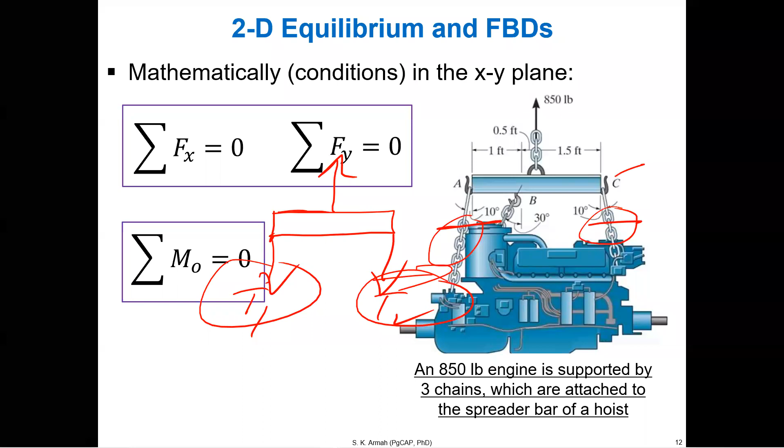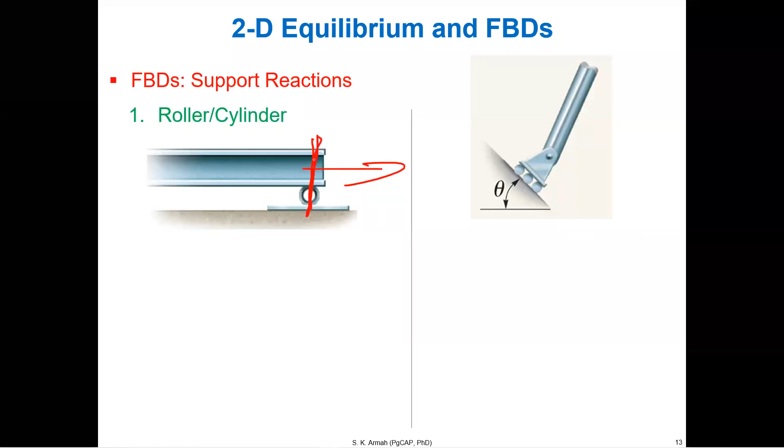So we talk about a roller. A roller allows movement this way, but it doesn't allow movement that way. So it means we have a reaction there, that's what we call a support reaction. And that support reaction is perpendicular to the surface.

And then we have the pin or a hinge. A 2D pin or hinge can only rotate this way. It doesn't allow movement this way or that way. So we have two support reactions, two force support reactions.

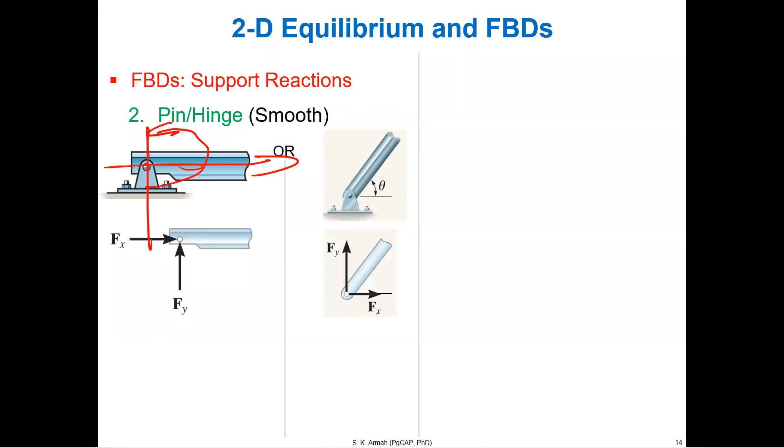Sometimes we show Fx, Fy, or sometimes we show the resultant F, where this resultant F is square root of Fx squared plus Fy squared, and the angle phi is tan inverse of Fy over Fx. So whatever the case, we have two unknowns. Either you use Fx, Fy, or you use only one single force at an angle.

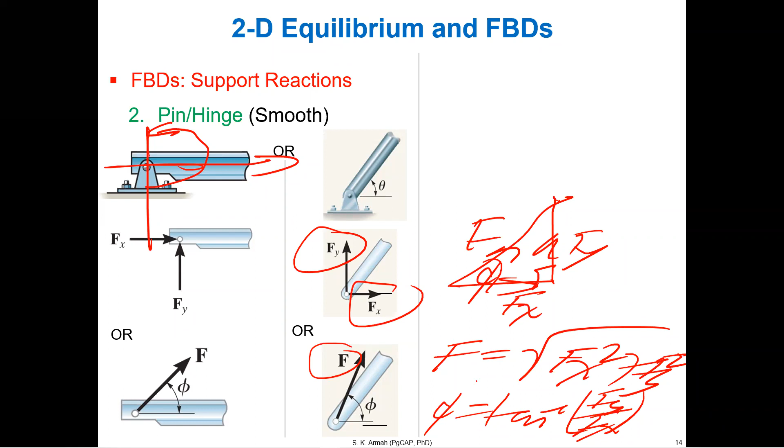And these two forces meet at 90 degrees. So if you draw Fx and Fy at 90 degrees, the resultant is F at a particular angle phi, and that phi can be found using tan. And the F, do a simple Pythagoras, F will be the hypotenuse.

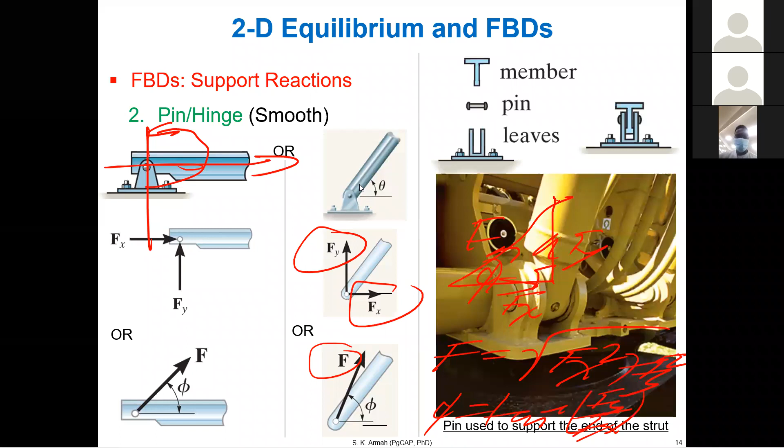And I'll show you how practically these things are connected. The other one we'll be dealing with is a fixed support. It's like you put something in concrete or a wall, and the beam is in the wall, like you put concrete or cement around it. So it cannot rotate, it cannot move anywhere.

So for a 2D case, the support reactions are Fx, Fy, and then there's a support moment reaction. These are support force reactions, these are support moment reactions. And then there's a collar, but I don't want to talk about collar.

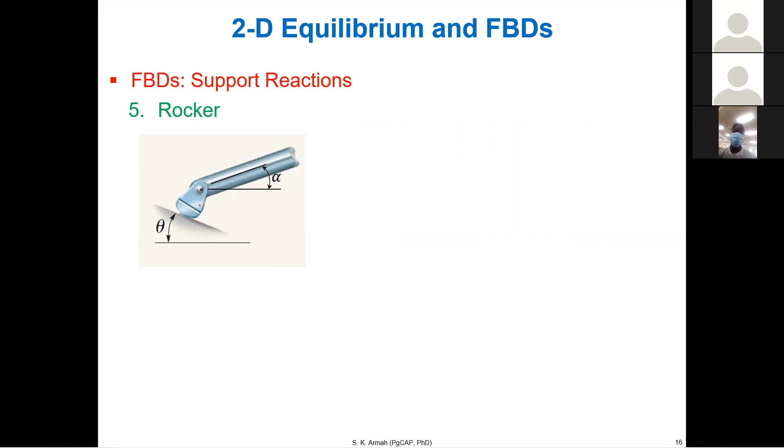Rocker is also similar to a roller, but only the way they design it is different, as I told you. Rocker allows the structure, this could be a big bridge, and rocker could be small or big depending on that. So it allows the thing to rock, it allows the structure to rock up and down. So it also allows movement, like the way the roller allows movement of the beam or the structure.

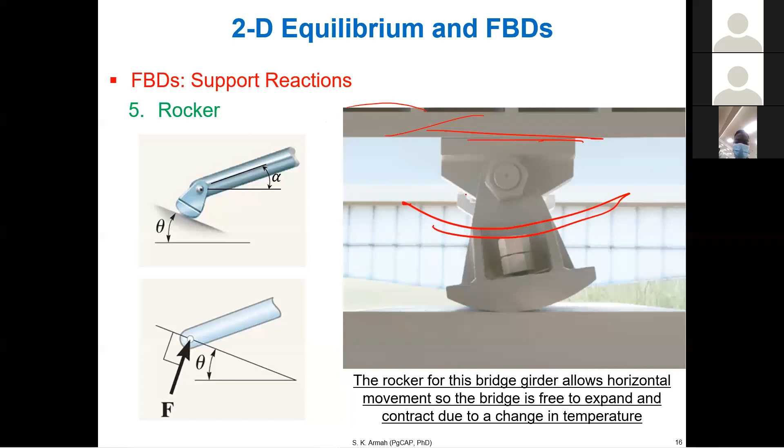So I start by drawing a free body diagram of that in class. I didn't solve anything yet. In fact, we're going to solve for an unknown. But here I want you to get into the mode of drawing free body diagrams.

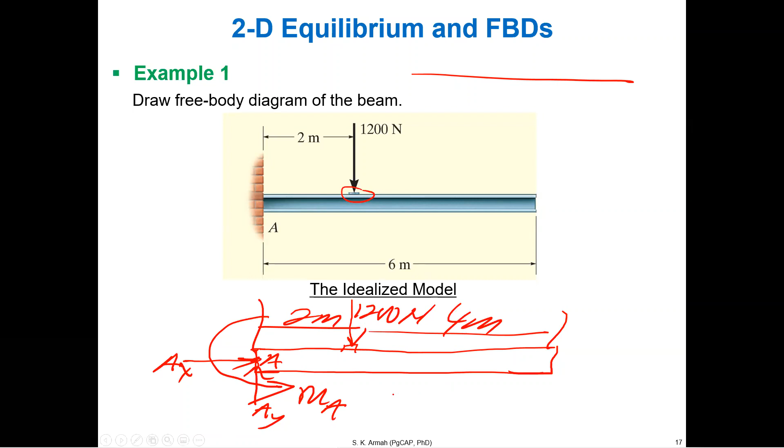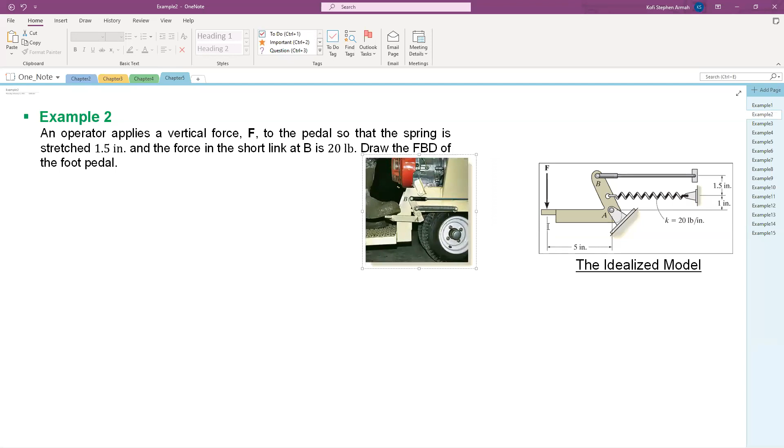Okay, so who wants to read the question? We are not solving anything for now, I'm just drawing free body diagrams. Later we'll solve some problems - right now I will just be drawing free body diagrams. So who wants to read the question? Sally again - you know the way I'm annoying with you. Okay, read.

An operator applies a vertical force F to the pedal so that the spring is stretched 1.5 inches and the force in the short link at B is 20 pounds. Draw the FBD of the foot pedal.

Okay, so FBD here means free body diagram, yeah? FBD here means free body diagram. So anytime you see me writing FBD, I mean free body diagram.

Okay, so the first thing is to draw the structure - draw this, what do you call it, the linkage of interest, or the pedal is all this. So you have to remove everything from it.

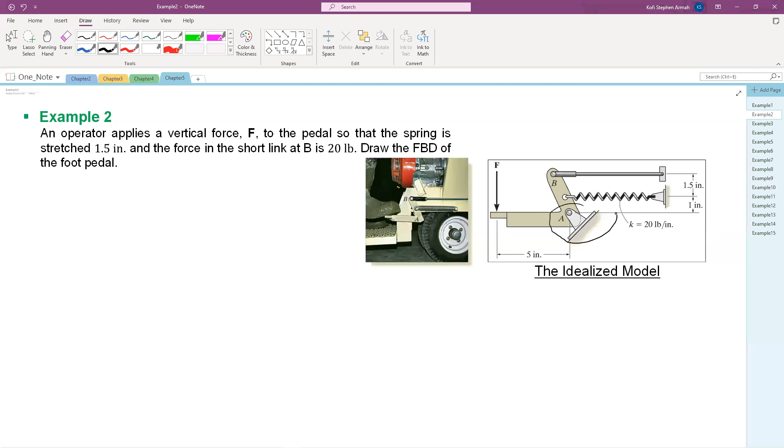What is this? What is this? What is that? And that is what is here - that's the red thing, that is what is here. What is that, Robert? Yeah, it's the hinge support. That's a hinge support, thank you. That's a hinge support.

So we'll take the hinge off. I'm going to draw exactly how the thing looks like. So we have this.

What I'm using might be difficult to draw, but I'll try. If I have a marker on a board, that's a different thing. So it goes like that, and then it bends. If you are drawing, I'm sure you'll do better than what I'm using with this pad stuff. So what I'm doing is trying to just draw what is there. It didn't come out well, but it's okay.

At this point, let's show what is known first. What is known is the way the guy is pressing it. The guy is using his boot here to apply a force, F.

We cut the linkage. This is a link, it's a bar, so there'll be tension in it. And this is like a spring, also there'll be tension. So you cut them. One is at this point here, so we cut it, and we show the arrow this way. And then one at this end, you cut it and show an arrow that way.

The force in the linkage, this linkage, is 20 pounds. So you put it there.

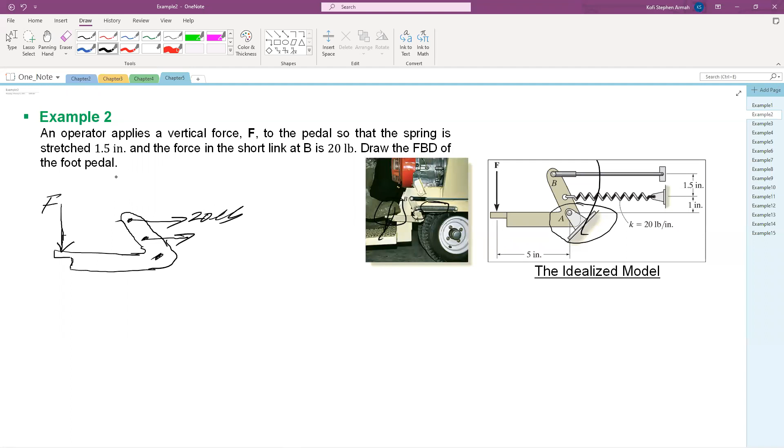The force in the spring is not given directly, but they gave it a stretch. After the guy has pressed it down, they give us how much the spring is going to stretch, as 1.5 inches. So we know the spring constant or spring stiffness. We can find that using F equal to K times the extension. Then the force in the spring generated will be 20 pound times 1.5, and 20 pound times 1.5 is 30 pound. So this is 30 pound.

Then you put it on your free body diagram. The next one is, and listen carefully, we don't have any coordinate system here. So you can show like this is an X, this is a Y. Let me do another diagram here.

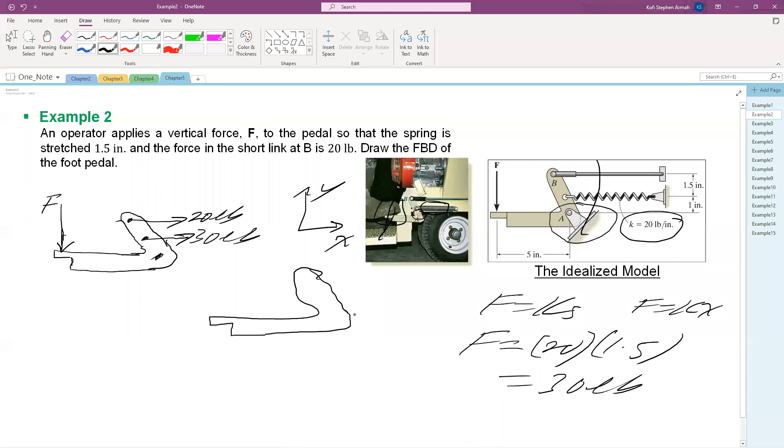This one didn't come out well. Somebody can decide to show the reaction here. You take the hinge off and put the point as A. So I will say AY, and then you can see this is AX, no problem.

But look at this, F is pressing down, so AY will balance F. Look, 20 pounds going here, 30 pounds going here. If you think you can show the AX to balance, you get negative, but no problem about negative AX. No problem with that.

Then look at this. I remember I told you that you can also take this as one direction and this as another direction. In that case you have to show some angles. If you try to show them this way, fine. Somebody can also show the reaction forces.

Let me do this one here. So this one is going to be our AY, this point A, and then this is going to be our AX. Then you can put some distances. There's some distance here which is 5 inches, and I made my diagram too small so it's difficult. You can make it a little bigger. I need to show the distances between these two, from here to here, from here to here, and this is 1 inch.

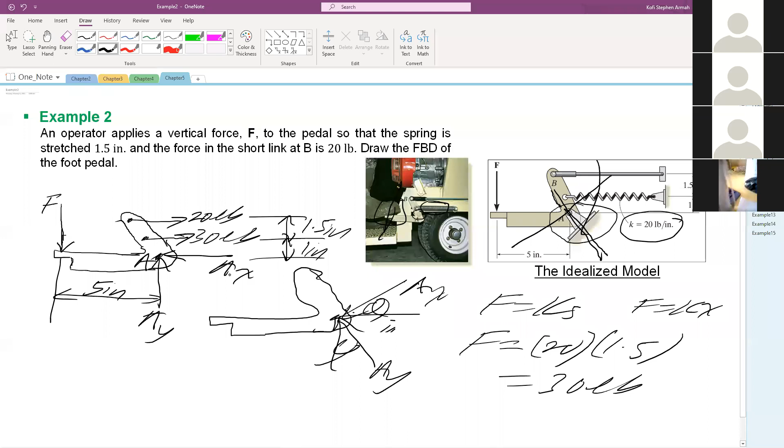I believe the rest can hear me, isn't it? Which audio? We can hear you, sir. Okay, so if you can hear me, please sort out your mic.

Let's go to the next example, 3. Once again, I'm drawing a free body diagram. Who can help me what to do?

We are not computing anything yet. In fact, what we are going to calculate is actually the support reactions. The support reaction I've been showing is what we need to compute. So who can help us draw the free body diagram here? Who's going to help me?

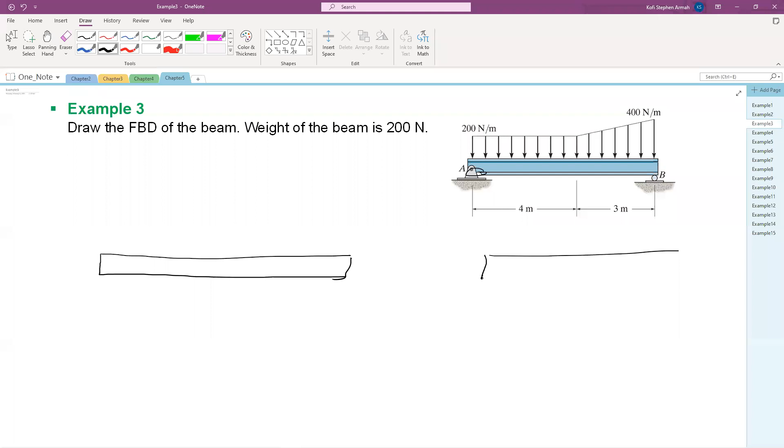I'll take everything away, then draw the beam. The beam looks like a rectangle. Let's draw a rectangle. If you want it to look the way it looks here, fine, no problem. You can make it like this, but this is nothing, it's just a sketch. So just make a rectangle.

Now, what is at A? Can you hear them now? What is at A? What do we have at A? Quick, life, simply the support reaction.

That is a... say pin. Don't just say support reaction, say what type. It's a pin or a hinge. So what do we do? What should I do? I'll take it off.

If you take it off, you have a hole in the bar, in the beam. What should I do? I'll put two forces there. One is AY, and the other one is AX.

And then what do we have at B? What do we have at B? B is not a hinge. That is a roller. So it's a roller, okay. So if it's a roller, we take it off. We take the roller off.

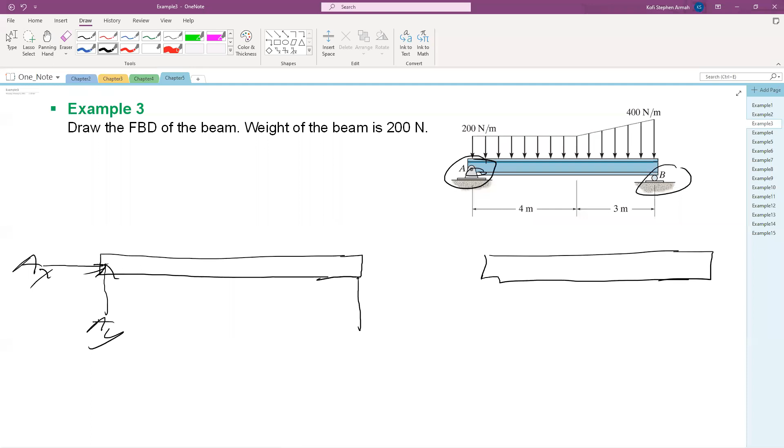Remember, we are drawing only the beam. Take note, a beam that is supported by a pin and a roller is called simply supported. I've also told you about a cantilever beam. A cantilever is when the beam is fixed to something. A beam that is on a roller and a pin is so-called simply supported.

Okay, so I'll use the letters there. I'll call this one BY. Then I have to put the load. These are the unknown loads or the unknown supports, and normally that's what we look for. Maximum, it can be only 3 unknowns. So as you can see, 3 unknowns. How do I show the forces?

Or how do I show the load? What should I do? Who wants to answer that? In fact, I should have done that first. I'm going to move this down a bit, and you have to do that calculation first. So what should we do? Who wants to help us, put their hands up and answer?

The previous questions we did, look at this, it was all point loads. All of them, including example 1, it was just point load. Look at this, point load. Here also point load. Applied load was point. We assume that the pressure the guy was applying to the pedal is pointed.

It's not really, yes, if someone wants to increase the accuracy, they can model it as a distributed load on the pedal. But we are looking at it from only this side, that's why it's 2D. We are looking at it from this side, that's why it's 2D. Change the distributed load to point load, that's what Jerry Justice is saying.

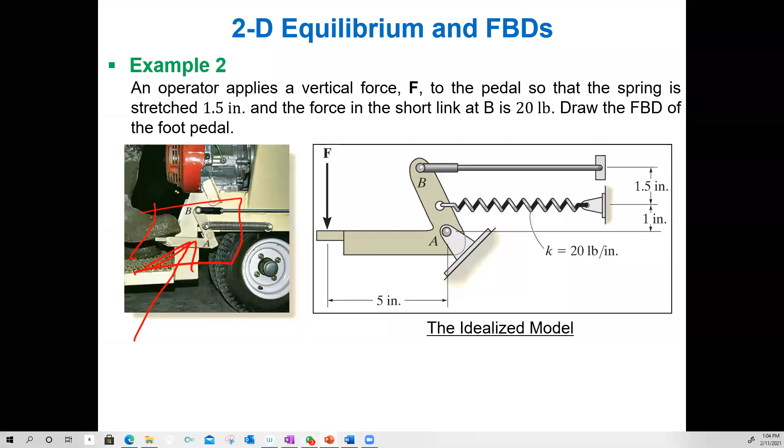So he said we should change it to point load. And how do we do that? We break them into parts. We've done this before, we break them into 2, 1 and 2. Is that right? Or you can also go for 3, 1, 2, and 3. So let's do that.

And you can even find the overall resultant, but you don't need to do that. Don't waste time, I didn't ask you to do that. That's the question we did for the previous question. Here, they didn't ask you to find the overall resultant of the distributed load, so don't do that. Just break it into 2 and show them.

So what we'll do is find FR1. And then what is FR1? Then we find X bar 1. And then FR2 and X bar 2. So who wants to help me? FR1, segment 1, is the rectangular one. Who wants to help me with the value?

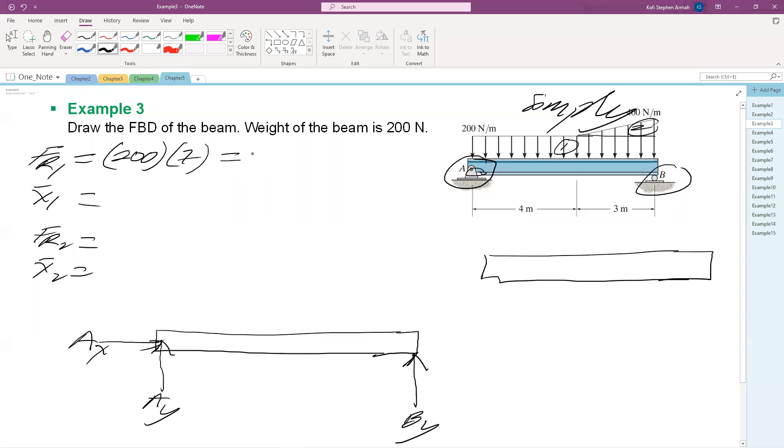200. Okay, if you're not saying 200 times what? 7, which is 1,400, and it will be newtons, and it's going down.

The corresponding x bar here, they didn't ask you to find FR x bar, so you can decide to measure them from A or B. It's up to you. But let me measure x bars from A. Then this is half of 7, and that is 3.5 meters.

And then what is FR2? What is FR2? Who wants to help? What is FR2?

Okay. Okay, thank you, sir. So what is the base? Sometimes coming in and talking like that without putting your hands up, there's no problem with that because you don't join the meeting.

Hello. So, what is the base? The base is 3, and then what is the height?

Hello. 400. Is the height 400? Remember, I told you that you make some mistake. The height is 200. The height is 200. I told you you'd make that mistake.

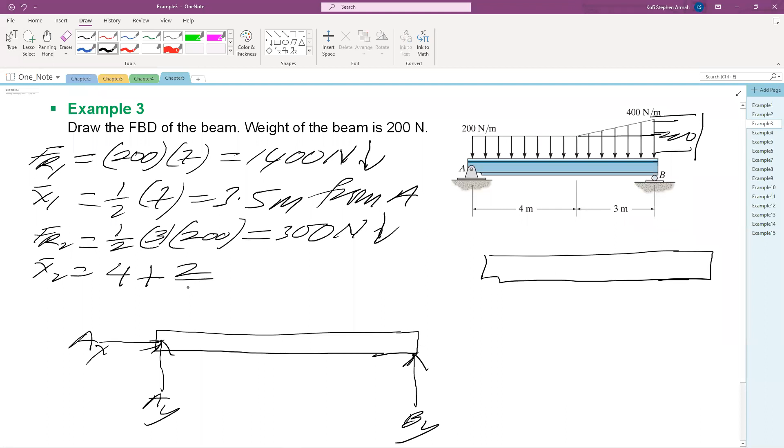4 plus 2/3 of 3. Okay, so the center is somewhere here. For the rectangle, the center will be somewhere here. And this, the center is somewhere here. So you have to find this whole distance. And for this, it's from here to here.

You can also measure them from B. Here, we are not doing like in the previous chapter. They didn't ask you to find overall result, and we don't need that. Somebody says, I can also do 7 minus 1/3, no problem. Or you can, in fact, also just do 1/3. You can also do 1/3 of 3. That is from B, and we just show it.

Here, we are not finding the resultant. I have a reason for saying that. We are not finding the resultant of the 2. So this will end up to be what? 6 meters from A. So let me draw the free body diagram, another free body diagram again here.

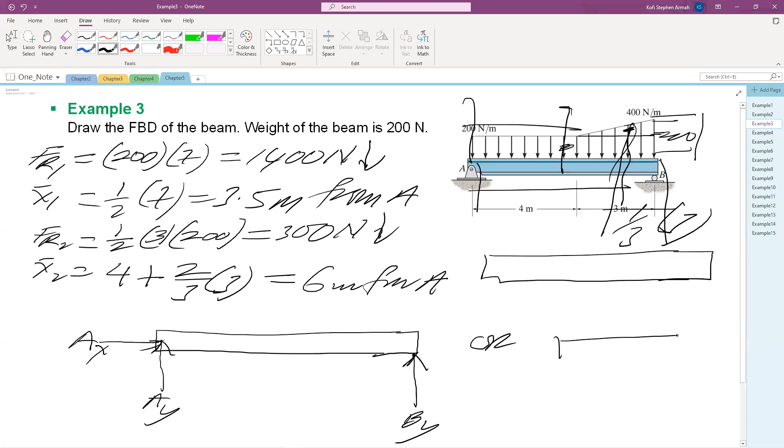So let me move this down. Let me move this down a bit so I can have space to show the forces. Somebody can also draw the beam. Let me show you. And put this as 8 meters from A.

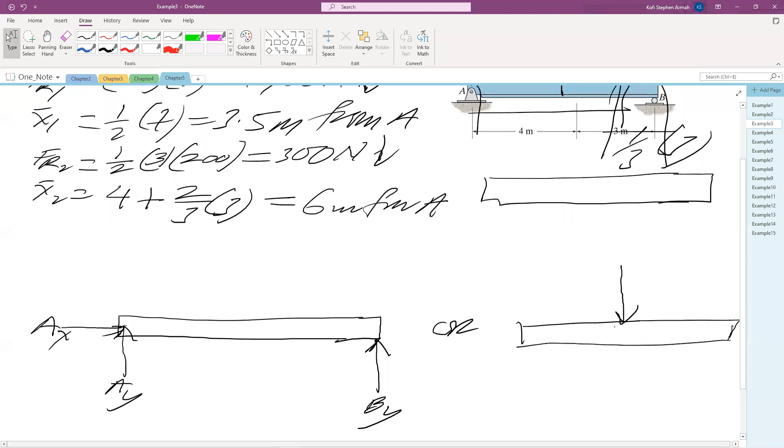I think it's 8 meters from A. 8 meters from A. Are you still in bed? Are you still sleeping? The whole thing is 7 meters. So how can it even be 8 meters? The whole length is 7 meters. So how can it even be 8 meters?

Who is that? Minus 20. Hello, who is that? Was it Kwame? Kwame, sir. No, the whole thing is 7 meters, please. So how can it be 8 meters? Sir, it wasn't me, sir. But who was that? Okay, so let's show the forces.

So one is right at the middle, which is 1,400 newtons. So from here to here is 3.5. And then the other one is somewhere here. Let me put it here, small.

And if you want, from here to here is 1. That's why I say you can decide to show it any way you want. That is 1 meter. Therefore, from here to here is 4.5. So that is 2.5.

So this we've been able to show, and this value is 300. This value is 300 newtons. And you have to show the points A, and that is point B. You can put some point there, no problem. You can even put a C and a D, no problem.

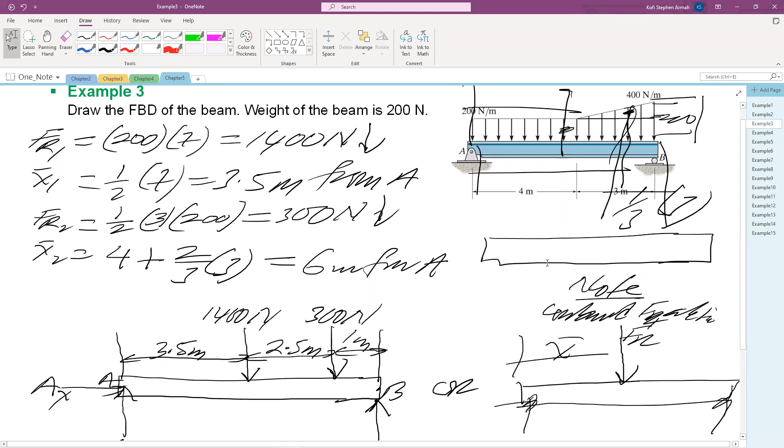Here they didn't ask you for that. They didn't ask you for that, so you don't need to do that. Okay, you don't need to do that. So that is our free body diagram, and they will ask us to calculate AX, AY, BY. We'll do that very soon.

Abubakari, what's the question?

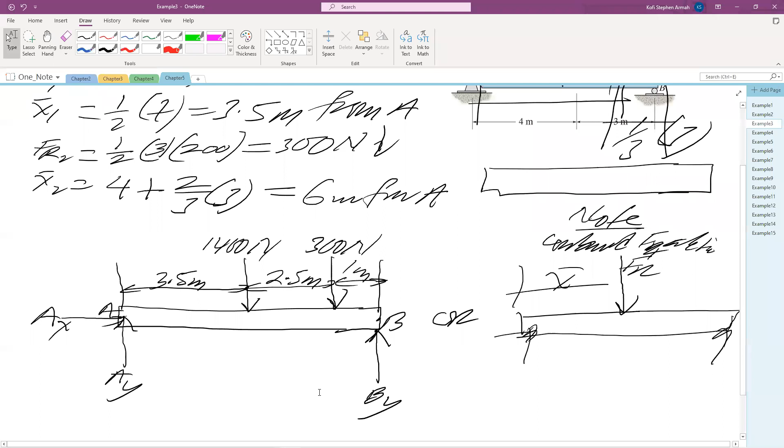Sir, I'm confused about how you drew up to the 2.5 meters, how you drew the free body diagram and indicated the 2.5 meters. The whole thing is 7. Can you see? The whole length is 7.

If you do 1/3 here, 1/3 of 3, you get 1, from B. So from here to here is 1, or from here to here is 6. So if from here to here is 6, it means from here to here is 1. And if from here to here is 3.5, 3.5 add 1 is 4.5. And if you take 4.5 from 7, you get 2.5.

So if we rather take it from the base, that's 2/3 of 3, we'll rather be getting 2. Why isn't the other side 1.5? If you do from the base, it's not 2/3, it's 1/3.

So the apex rather, from the apex is 2/3. So the 2/3, right? I thought that side would be 2. Why didn't we rather choose 2 instead of 2.5 and 1?

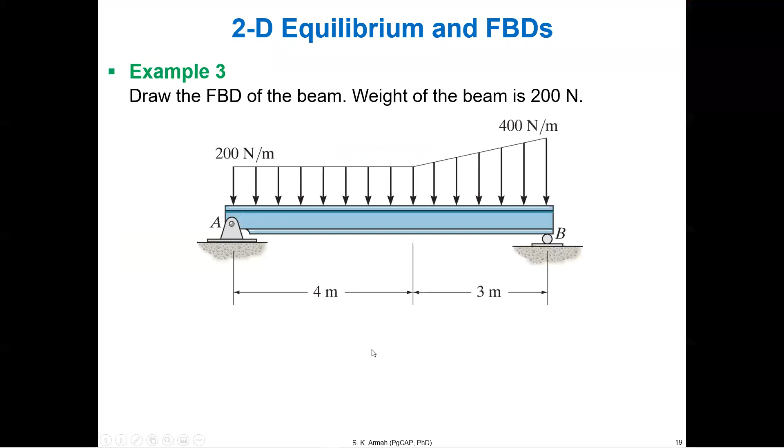I'm intentionally showing how to draw the free body diagram, but I haven't calculated anything yet, haven't added anything. So now, someone asked a question: do you draw the free body diagram again after you find the solution? No, we don't do that. If somebody teaches that, it's wrong. The free body diagram contains known and unknown forces, so when you calculate an unknown and get a negative, don't change the free body diagram. We don't draw it again.

If you get a negative, don't worry, it just tells you that it's opposite to what you showed on your free body diagram. Kwame, if it's clear, let me know. Paul, yes - if you do 1/3 from B to be 1, that's why I put the 1 meter there.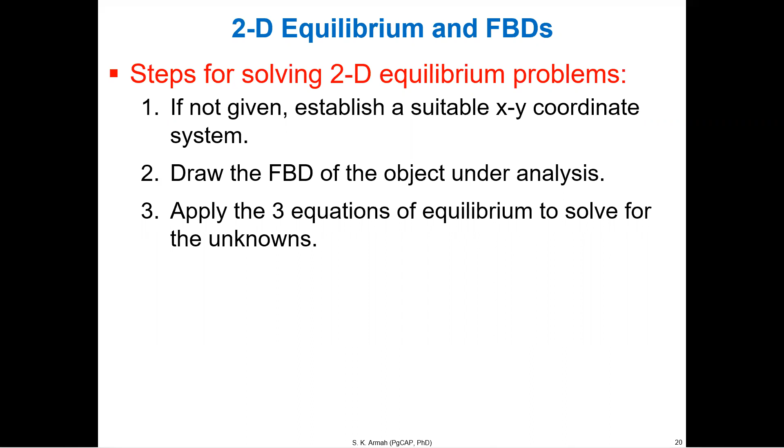So how do we solve a 2D problem? The first thing is to draw a free body diagram. If you draw a good free body diagram, the question is solved, just like we did for a particle. But here the difference is it's a rigid body, so you have to put some distances and angles. Then you apply 3 equations - normally you can only have a maximum of 3 unknowns. Sometimes you can choose a coordinate system, like this is your X, this is your Y, but normally that's not necessary.

So let's start with our first example. I'm switching to my white screen. Who wants to read this one now?

Who wants to read this?

Determine the component of the support reactions for the beam loaded as shown. Neglect the weight of the beam. Take theta to be 0 degrees.

I like that, I didn't actually put the word 'take' there myself. Thank you, whoever said that. Oh, it was in the lecture notes? I don't think so... interesting, who was that? Sir, please, Larry, thank you. I didn't say take, but that's a strong word there.

Take, yes, take. Because theta can be anything - 60, 30, 20, it can be anything. But we want to keep it simple, so we want to make it 0 degrees, so that this thing looks like this.

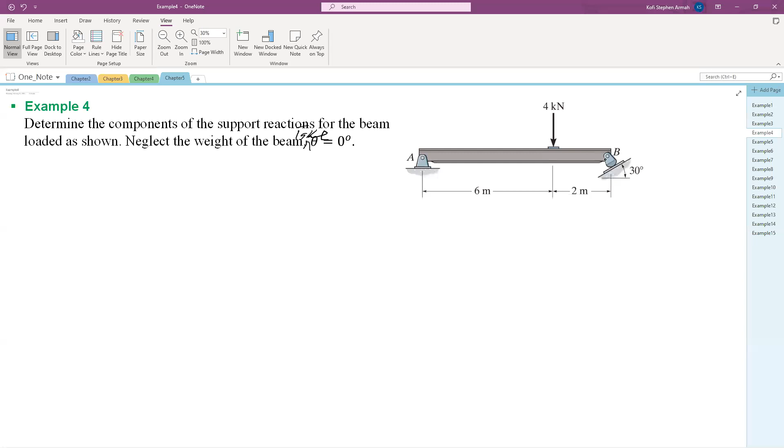It's like this. Okay, first of all, what is this, and then what is this? What are these supports holding the beam?

Robert, you want to talk? Sir, yes, it's a rocker. Which one is a rocker? The support at B. Okay, and then what about A? The one at A is a hinge support, it's a hinge or a pin.

So it's a hinge support. Normally they will say find the magnitude of the component, so we don't care about negative or positive - we want the components of the support reactions. So here we are going to calculate our AX, AY, BY, and stuff like that. That's what we are looking for.

They will not directly ask you to draw the free body diagram, but you have to draw it before you solve the question. If you just solve the question without it, even if it's right, I would give you a 0, because the solution is based on the free body diagram. So let's draw a free body diagram.

Once again, is this similar to what we did? So you make a bar like this, and then we take the pin off, and we show AY, AX.

The loading is only in the vertical direction, so when you finish, you're going to see that AX will be 0. If the loading was at an angle, it would have a component in both X and Y, and the pin would generate a reaction force in X.

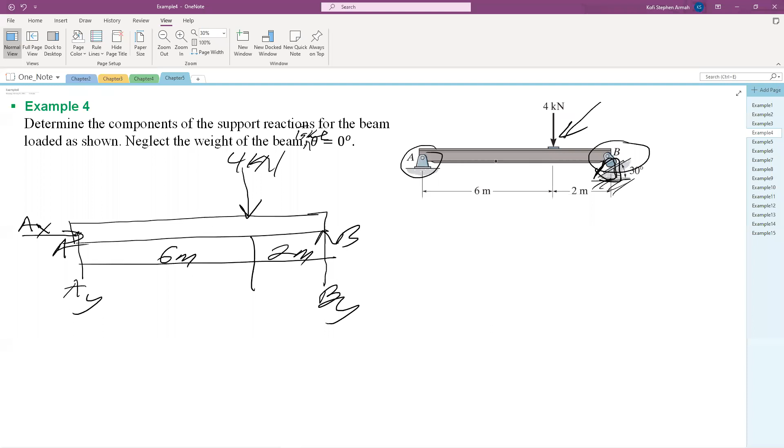The beam sometimes has a weight, and that weight might be, let's say, 0.2 kilograms or grams or something. Sometimes the beam's weight is small compared to the applied load, so sometimes we will neglect it. So anytime a problem doesn't give you the weight of the beam, it means you are neglecting it - anytime they don't say anything about the weight.

If it has a weight, where do we put it? If we are taking the weight or mass into account, what do we call the point where we put the weight? The center of gravity. So we put it right in the middle - this is 8, so we put it at 4 meters from here, 4 meters from here, and that's what we'll do.

So we are neglecting it, that's why we don't put anything. So how many equations do we have? Three. And we have three unknowns.

So the first one is sigma F sub x equals 0, so AX is 0. Is that true? There's no doubt about that - it's straightforward.

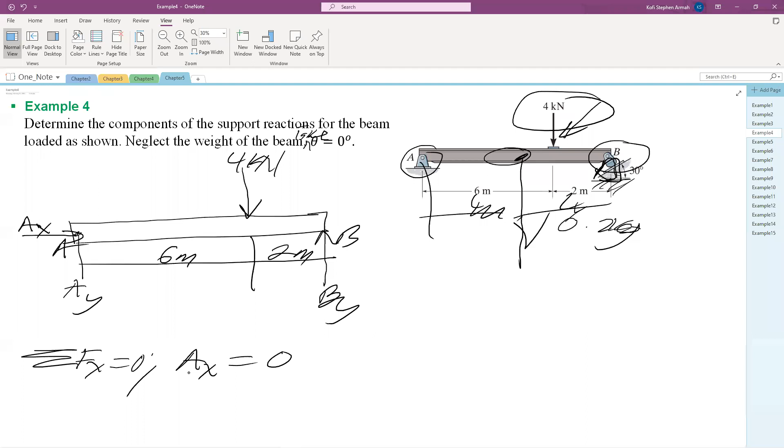Ax is 0. Then you take moment about A or B. Any of them is fine. Normally, you can take moment about the place that has more unknowns on it.

If you take moment about A, it's like putting your finger at point A. Then this BY will try to rotate it this way, and 4 kilonewton will try to rotate it that way. So they are going opposite directions.

So I'll get BY times 8 equal to 4 times 6. Did everybody see that? And if I remember, I told you the way I like to write moment: I'll say this side minus that side.

This case is not like in chapter 4. In chapter 4, we find the resultant moment, so I say this side minus that side, done. But here it's this side minus that side equal to 0. I would like to write it so that this side is equal to that side. Everybody clear with the equation I just wrote down?

Everybody? Please come again. What I'm saying is, don't confuse chapter 4 with chapter 5.

For chapter 4, we're looking for the resultant moment, so I normally say this side minus that side, done, choosing one side as positive. But here you have a beam, and some moments are turning this way, some are turning that way, and this is in equilibrium.

That's chapter 5. So when writing the moment, I say those trying to turn this way equal to those trying to turn that way. Let's say the total moment this side is M1 and that side is M2. I can write M1 minus M2 equal to 0, or M2 minus M1 equal to 0, or M1 equal to M2, and I'm using the third option.

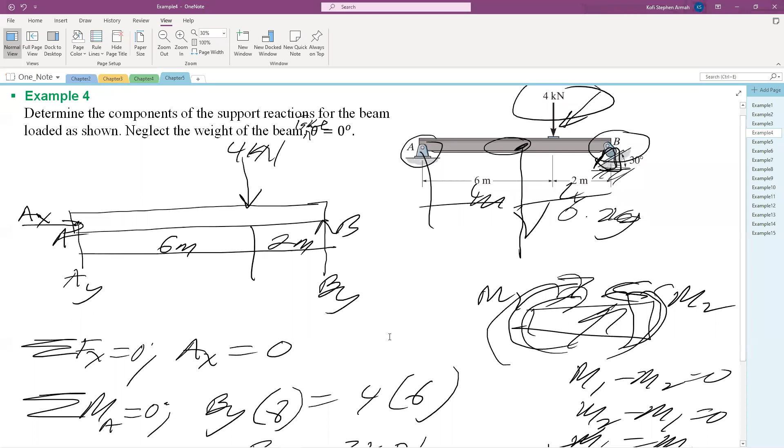You didn't show from the free body diagram, you didn't show the Bx. Can somebody answer him? He has improved on his question, so can somebody answer him?

So is it because of the support? Then if you know, don't answer yourself, you shouldn't have asked the question. Kweku, do you want to answer him? His question is answered, he has answered his own question.

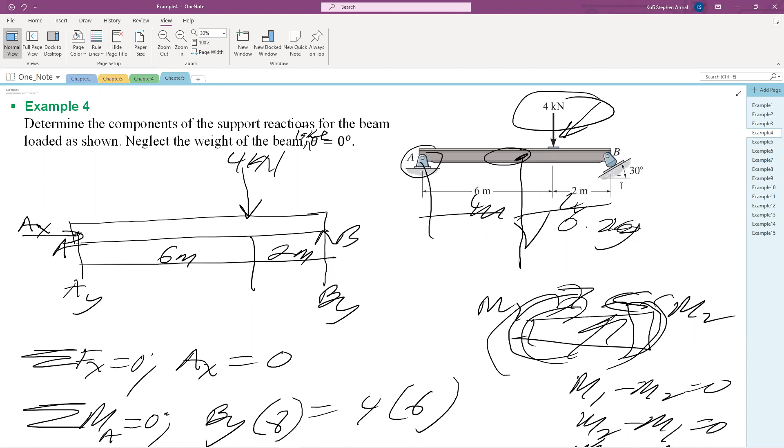Yes please, it has only one support reaction. Go and look at the notes that I gave you. A rocker and a cylinder always just have one support reaction perpendicular to the surface. So we are not just putting any B, I'm using B.

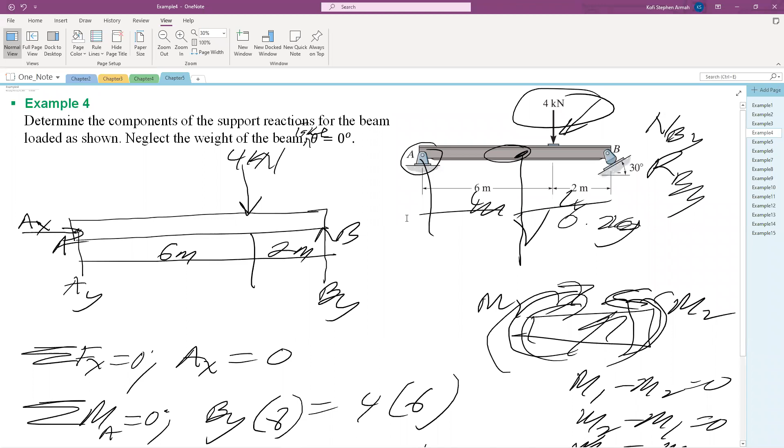You could have also used, like some people use N and R for support reaction. So you can write things like N, BY or R, BY. But I want to make it clear, so I normally use the letters at those places for the support reaction. So Bx is nothing, done.

Then, do you know I can also take moment about B and find AY? Everybody okay with that? Hello?

So let me write it here. You can also take moment about B equal to 0. And that will allow you to find AY.

But you can then use summation of forces in the Y equal to 0. In other words, sum of forces upward equals sum of forces down. So you're going to get AY plus BY, going up, equal to 4. Can you see that from the picture? AY plus BY is equal to 4. Can anybody see that?

Then you substitute in and you get your AY to be 1. They have to add up. Your AY and BY have to add up, in this case, to 4. And you're done. So we find the support reaction.

Very, very straightforward. You don't need to start with sigma F first. Normally, you can always start with the moment, because the moment, you always take moment about the point that has more support reactions. Then you can find another one, then do summation of forces in X, summation of forces in Y. But sometimes instead of summation of forces in Y, you can do another moment. So if you also took moment about B, you could have easily gotten AY too. It's up to you. Let's move on to the next example.

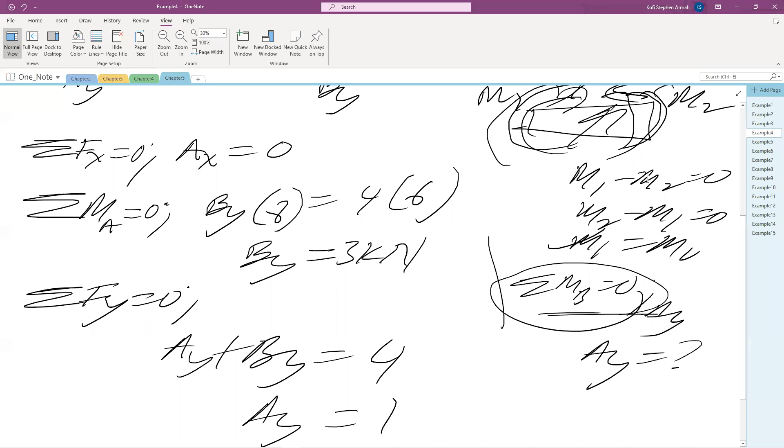Number 5. I've just intentionally made some small changes to the previous example. So who can tell me the difference I've made? It's the same beam, but I've just increased the complexity a small bit. So look at the question and tell me what I've added to it. I'm now solving a lot of problems for you.

I've added a moment, a couple moment. Remember couple moment? This could come as a result of what? A couple. And I told you couple moments are free vectors, so you can put them anywhere on the beam. It's already moment two, 200 newton meters.

What else have I changed in the question? So I've added a couple moment. What else have I changed? Theta is equal to 60 degrees. So the rocker is not perpendicular, but it's at an angle to the beam.

Okay, it's an angle. So let's draw a free body diagram. We are finding the same AX, AY, BY, and so on. That's what we're doing. So I'll draw the same thing again. Take this off. This is AY, and that is AX.

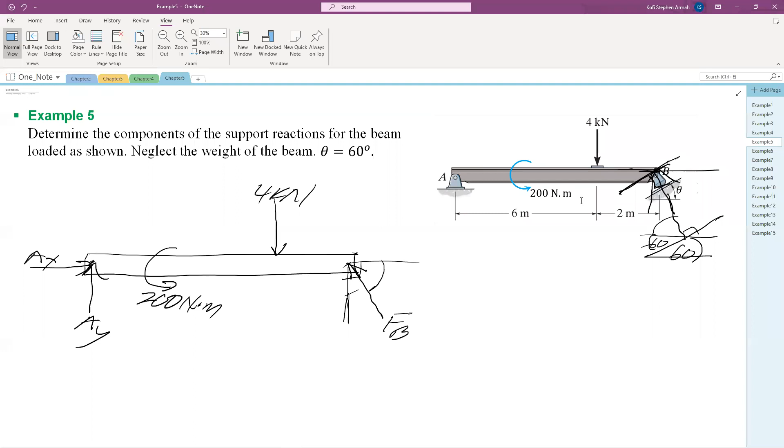So this angle is what? Yeah, we can't see a cursor or something. Oh, really? You can't see me writing? Yeah, it's very small, you can't see anything. You can't see you pointing the cursor, like you can't see. No, I'm writing. You can't see this small angle that I'm writing, 60 and stuff like that. I said we can see, but at first you're showing the cursor.

Okay, so this angle is 60. So I'm making it big here. So this is 60, this is also 60, and this has to be 30. Is that true? So this, if you draw very well, this has to be 90. So this is 30, and this is 60. So you have to put only one of them, you have to figure it a little bit. This angle is 30, that is 60.

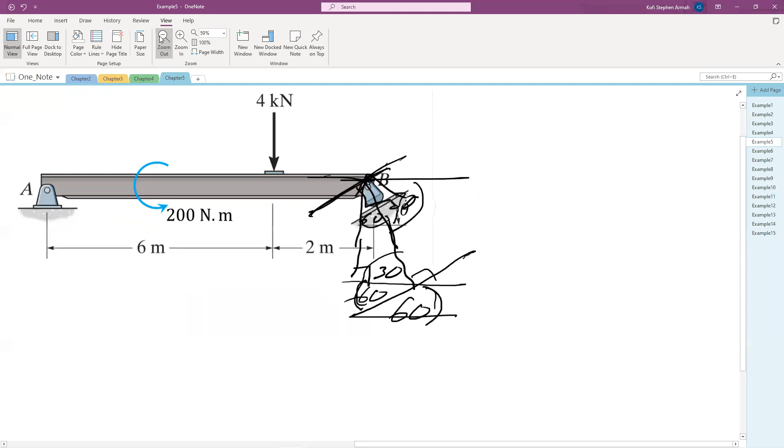So let me zoom out a little and go back to the program. So this angle, which one do you want? Let me do the horizontal one. This is 30, or this is 60, just put one of them. And this point is A, and that point is B. And this distance is giving us, let me put it on top.

This is 6 meters, and that is 2 meters. Okay, make sure you put the arrows at the end. There's arrows here, arrows at the ends. Very, very important. If you show a force without the arrow, then it's not good.

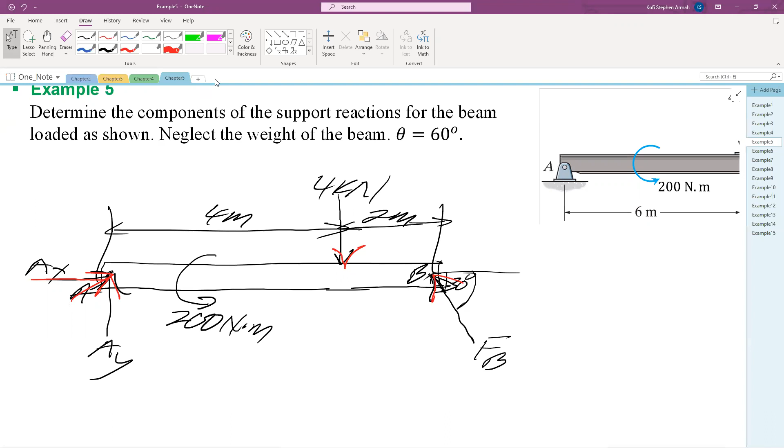Okay, so who's going to help me solve this now? How many unknowns do we have? And that's what we're looking for. We are determining the components of the support reactions. How many unknowns do we have, and how many equations do we have?

Yeah, quick life. Sir, please a question, how did you manage to get that 4 meters up there? Because I think in the... oh, sorry, question 6. Sorry, 6. Yeah. Thank you. 6. Okay, quick, yes, go ahead.

How many equations and what are these equations? Which one will you go for first and why?

Who want to talk? Emmanuel, or Immanuel? Immanuel. I don't know how you pronounce your name.

Sir, yes sir, please before you said that, the side with the most number of the support reactions, you take moment about there, about that point. And normally that's the first thing you should do to make your work easier.

So where should we take moment about? The A, X, A, Y, that side, the A. No, don't worry about A, the point, we are taking moment at the point. You see, we are taking moment about the Z. If this is like the X, Y plane, then it means the Z that is coming out. So every point here, A, B, are on the Z axis, so we don't say moment about Z, we just say moment about the point A, B, C in that order. So we take moment about A equal to 0.

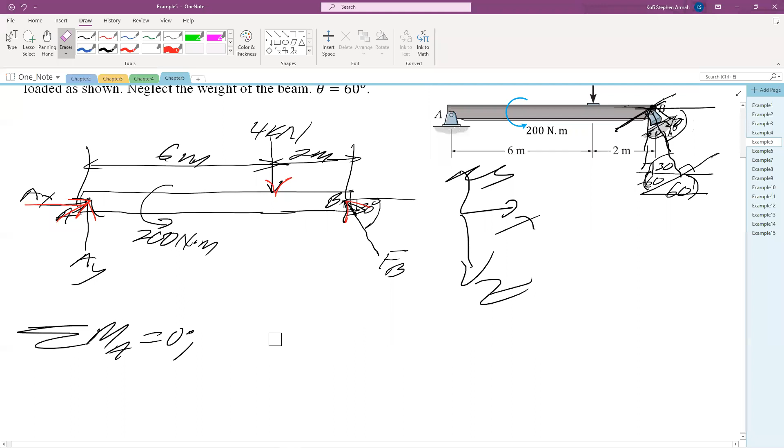Okay, so please, won't we add a distance? Sorry, I'm coming on, let's do something quick. Look at the picture very well. If you put your finger at A, how would the 200 rotate the beam? Put your finger at A, just put your finger at A. The 200, how will it rotate about A?

First of all, let's take the 4. How would the 4 rotate it? About A, this way, is that right? Let's take the 4 - 4 rotated this way, is that right? Call it clockwise. Yes, sir. And this one in your diagram is shown as counterclockwise, so they have to be in the opposite.

Then let's take the FB. The FB, what do you have to do with the FB? You have to break it down into FB sine for the horizontal, FB sine for the vertical, FB cosine for the horizontal. If they don't give the thickness of the bar to you, that means it's going to pass through A, so the FB cosine will not have moment. It's only the FB sine, and that FB sine will try to rotate the beam this way. So this and this will be on the same side. So it's going to end up to be FB sine 30 times the distance from A, which is 8, plus the 200 is equal to 4 times 6. Pause and think and look whether you've gotten it. And I believe nobody's going to ask me to multiply the 200 by a distance.

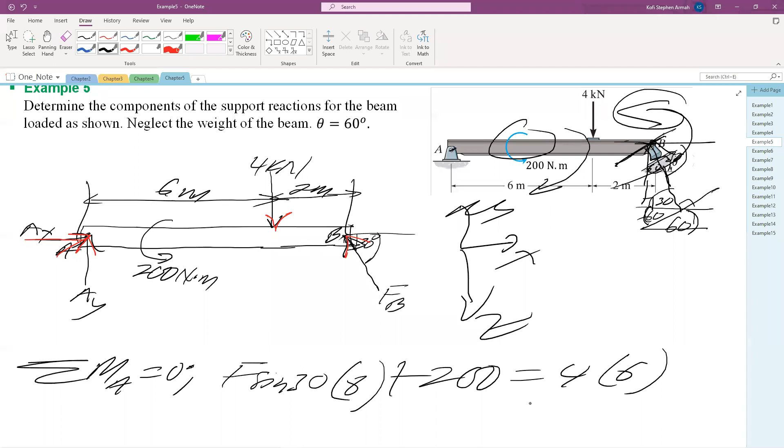Somebody is saying I should do 4,000 times 6. Is the person right or wrong? I did 4 times 6. What's the difference? Oh, this is FB, sorry. Somebody said I should do 4,000 times 6, but I have done 4 times 6. Who can comment? That is kilonewtons - no, it doesn't matter. Who can talk? It means if I do mine this way, I can add the kilo to it. After getting FB, I'll get my answer in kilonewtons.

You will get your answer in newtons, that's the meaning. I'll get my answer in kilonewtons? No, you get the answer in newtons - the 200 is not 200. Oh, thank you, thank you, I like you. It's not kilonewton meter, so then it's going to affect things. Yes, that is okay now. Thank you very much, you spotted it. So somebody is saying that this is newton meters, so in this case you have to change this. If this was kilonewton meters, then there's no problem. So the person who said this is absolutely right, we have to make sure it's consistent. It's like they started that, so now it's consistent - is it consistent now? You will add your K later on. Not necessarily - is it consistent now? Yes, sir.

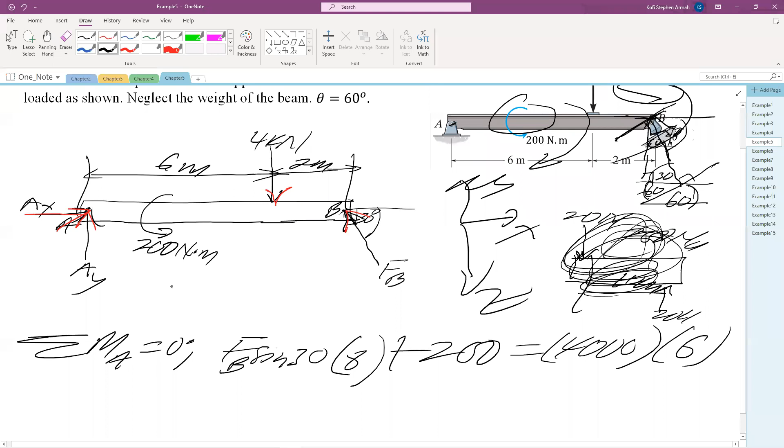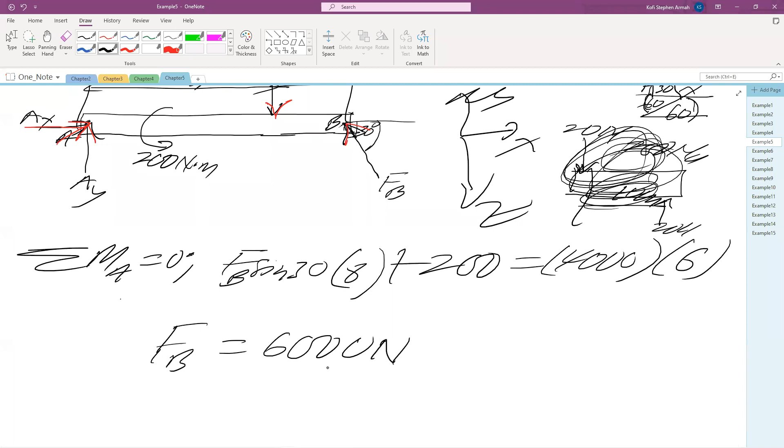6,000. Please, I don't have answers to some of these things, so whatever numbers you give me is what you write. If you go and find out it's wrong, don't come complain. Whatever the right answer is, is the right thing. So whatever your mate gives me is what I write.

Okay, now what's the next thing to do? Since you got FB, it means we can now do what? You can do any of them first. You can do sigma F equal to zero. That will allow you to get AX, or you can do sigma F of any of them.

Sir, yes. Please, I don't think your answer is right too. So give me yours, there's somebody giving. I know which one is right. I don't know, I've not used the calculator. Five, the answer is wrong.

5950. 5.95, so 5. K 550. Yes. 5.95 kilonewtons. Okay, point.

My place is at, okay, that's for whatever you give me. I'm not interested in answers, I'm interested in the procedures. Let's go on. Since you're able to find what is FB, it means we can now find AX, because there's a component of FB that has to balance AX. And there's a component of FB together with the 4 kilonewtons that have to balance AY. So let's do AX first.

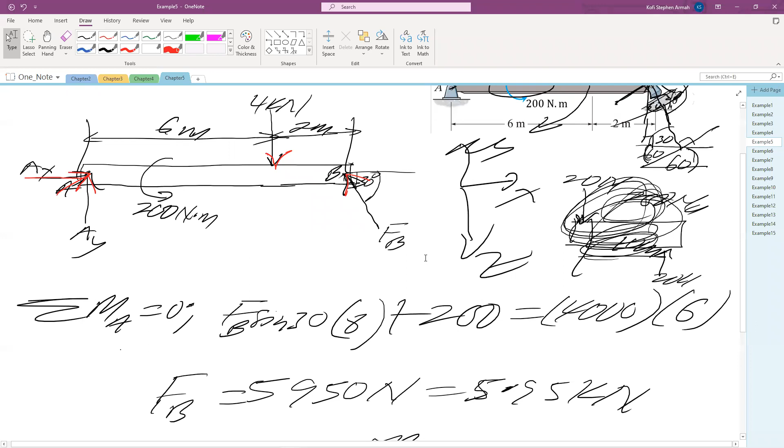Let's do AX first, so what do you have? AX will be equal to what? FB cosine 30. Can anybody see that? Can everybody see that AX will be equal to FB cosine 30? Yes sir. Okay, so I'll write that one here. AX is equal to FB cosine 30. And then you put whatever your cosine in and you get your answer in newtons.

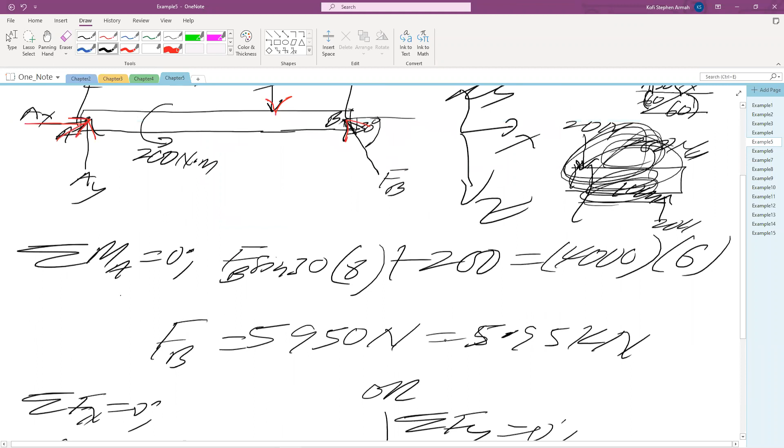And you can write the answer in kilonewtons. The reason we do that is when you are reporting the answer, because the force was given as kilonewtons, you have to report your answer back in kilonewtons. That's what we like to do. And then you do summation of forces in the Y. Let's see what we can do. So look at this: your AY plus FB sine 30 is equal to the 4 kilonewtons. Your AY plus your FB sine 30 is equal to 4. And then you work out whatever AY is and you get an answer.

Let's move on. Let's move on to the next example. Sir, please, question. Yes. Sir, please, my question is pertaining to the free body diagram.

Is it appropriate to locate the FB sine 30 and FB cosine 30 on the diagram? I don't have an issue, but let me train you very well. When we draw, because all of us have been taught before, and people teaching mechanics teach all sorts of things, some people don't understand, so they will write the resolved components already in the free body diagram. They will write the FB like on an inclined plane, like you've done before, writing something cosine 30, something sine 30 on the free body diagram. It's good, it's not wrong, it's correct. But for very good work, we don't do that on the free body diagram. When we are writing the equation, that's where we resolve.

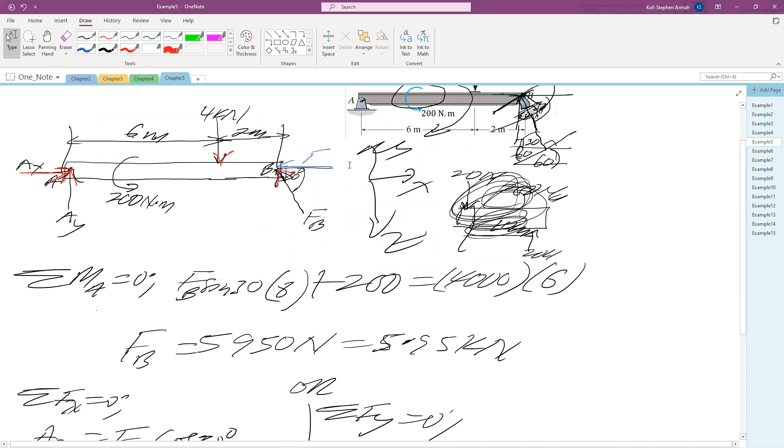Okay, let's look at the next question. I wanted to finish too, but since the time is almost gone.

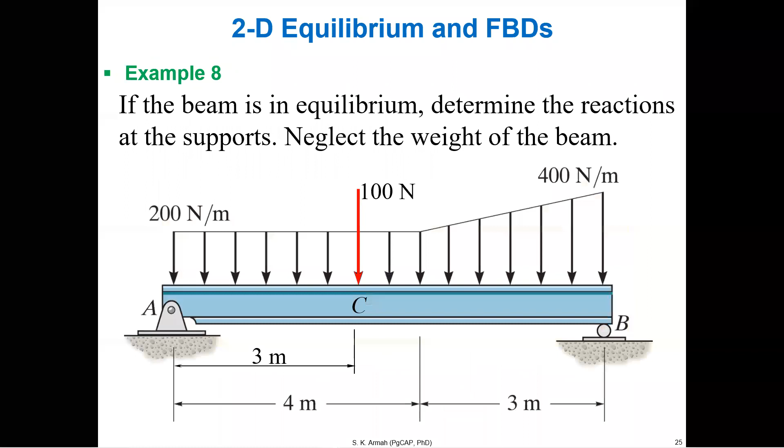Okay, let's do about 2 more. If I can do, let's do this one. Let me just explain this one for you, then I'll do the next question. I'll not do this one, I'll explain it.

Okay, have you seen this question? Hello, I think this is in the textbook, so you can look at it. Hello, can you see this question? Yes, yes sir. If you respond to those ones, I don't have an issue.

Oh, who is that? Aberdeen. So can't this person sometimes realize? And if you mute, then it doesn't mute.

The other question that we did, like this one, what is the one we did here? The one here we did FB. We assumed the line of action is passing through A because they didn't give the thickness, so we were neglecting the thickness. But if they give the thickness, you have to take it into account when you are resolving.

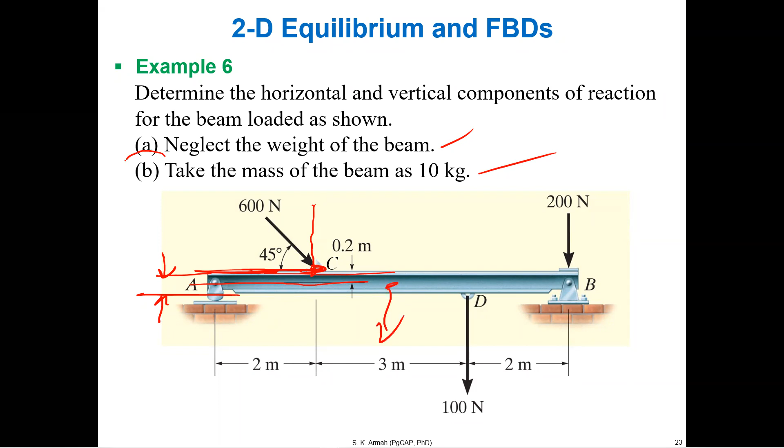And this question, I wanted you to do it without taking the weight into account, and then taking the weight into account. And the weight always acts at the center of gravity. So let me draw the free body diagram for only B, and then I can move to the next example.

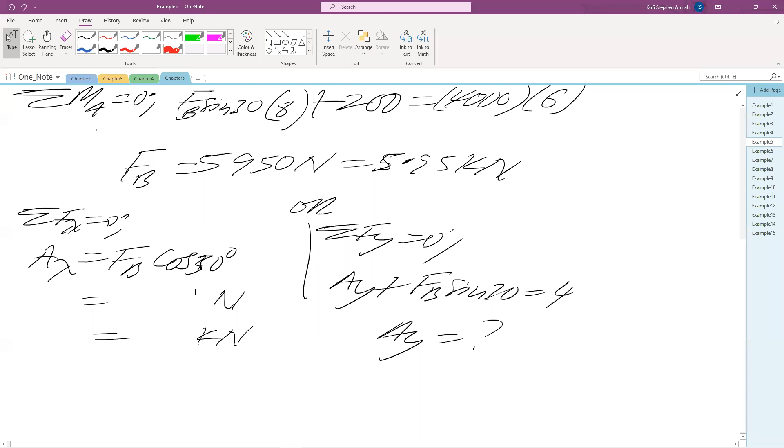The computer engineers, I know you guys, the reason I'm finishing early, 30 minutes, I want to finish in 1 hour. I think you guys have a class at 2:30 or 3. What time is it?

Computer engineering, can somebody talk? What time do you have your computational class? Sir, please, we don't have a class today. Yeah, we don't have class today. Okay, then that's fine. So who are having practicals? Chemistry practicals too. At what time? So we have chemistry practicals. At what time? 2:30. Okay.

So I'm doing B. Later, A - the difference between A and B is that you are taking the weight into account, so you can easily do that. So let me draw the free body diagram. Our free body diagram will look something like this.

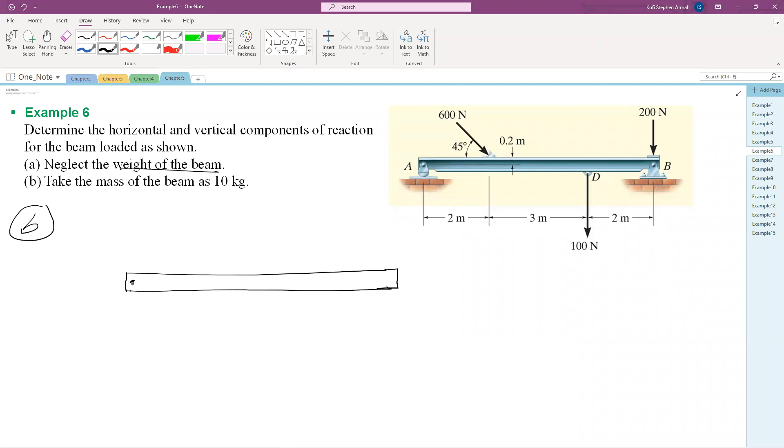Once again, we have a rocker. So you take it off and then show 90 degrees. I'll call it AY. This is a pin, so I'll remove it. And then I'll show my AX this way. If you show it to the right, it's also correct.

Only it will end up to be negative. I know, because this one will go this way. So I'm trying to do it to balance it. If you get negative, please, it's correct too.

Oh, so this is B. This is BX. And that is BY. And then there is some load here, applied on something small that is attached to this. That is 200 newtons.

And then there's something here, and then there's a load that is holding it. It could be some weight. And then there's something here, and there's a load applied to it.

But you don't need to do anything - you could show them directly on the beam. You don't need to show those little things, you can show them directly. But I just want to do something different for you to see.

This is 45 degrees. This is point A. And this is 100, that is 200. Let's show the distance - from here to here is 2 meters.

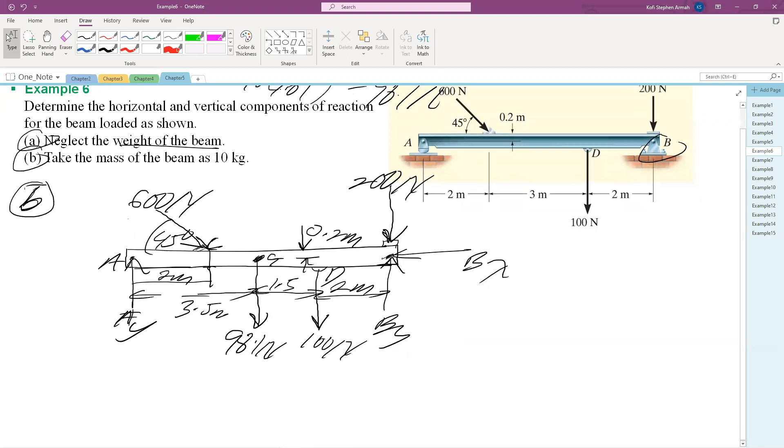Okay, what will you do? Which equation will you apply first? There are 3 unknowns: BX, BY, AY. Which equation will I apply first? I'll write them, but I will not write the answers. What will you do first? What will be your main focus?

So let's find AY first. If somebody can find AY first, even if somebody can, so if you want to find AY first, you can take moment about B is equal to 0. So if you take moment about B is equal to 0, who can help with the equation? So let's do it, who's going to help me?

I always like to write my unknown for BY times 7. BY is turning the beam that way, BY times 7 is turning this way. What else is turning that way? All of them are coming the opposite. Is that right? BY is the only one turning this way.

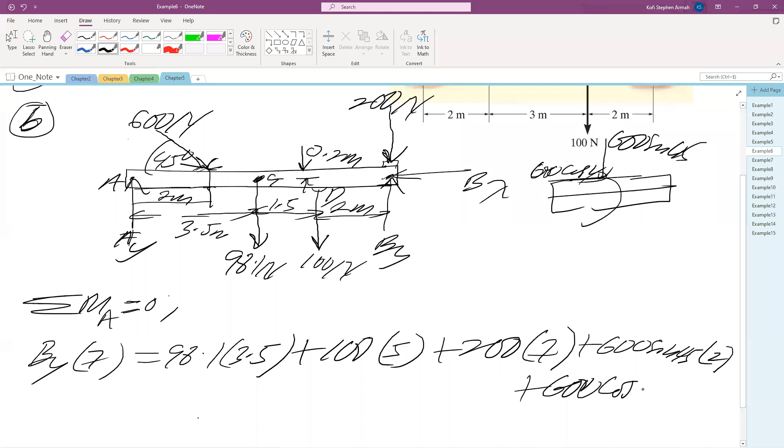But if you are taking the thickness into account, then what's happening here is that the 600 sine 45 like this, and then the 600 cosine 45 like this, you have to multiply by the thickness. And if you are taking moment about A, which side would they go? The sine one will try to rotate this way, and this one will also try to rotate it that way. Is it plus? Can somebody confirm? 600 cosine, you have to add 45, and you have to multiply by 0.2. You have to multiply by 0.2. That is the only difference I wanted to point out to you.

Sir, please, the 600 cos 45 times 0.2, is it negative or positive? Let's see. If you put your finger at A, this is point A. You put your finger at A, this one will try to move, pull it this way. So that one, the sine one will definitely be positive. Then what about the cosine one? Just put, if you have a piece of paper, put your finger there and see how it's going to turn. Because the arrow is going this way, and this arrow is coming down. Let me make it again. This is coming down, and that is point A, and this is like that.

Can somebody enter all this and give me this in the textbook? The textbook doesn't have the weight, so that will cause the difference.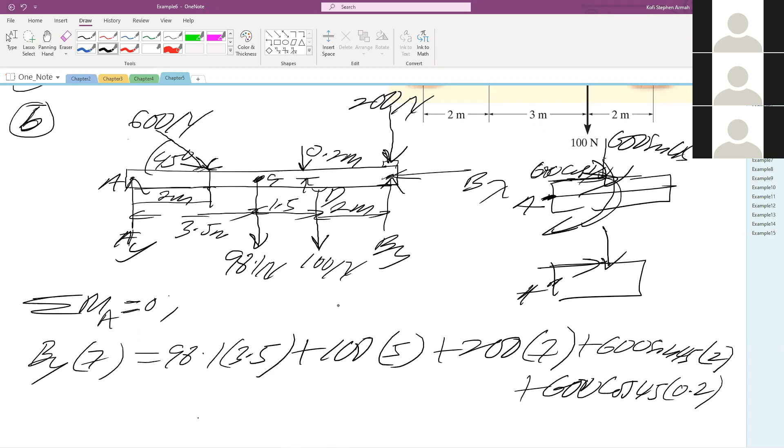Okay, let's do moment about B, and let's see what we get. Let's do it. Can somebody help me with moment about B? Who wants to talk? Who wants to help me? That's the reason I'm writing this. Let's do moment about B. Okay, Lenovo.

AY times. Go ahead, talk. Sir, please, for the 600 cos 45, wouldn't the thickness... hold on. I said somebody help me do moment about B, then you can ask your question.

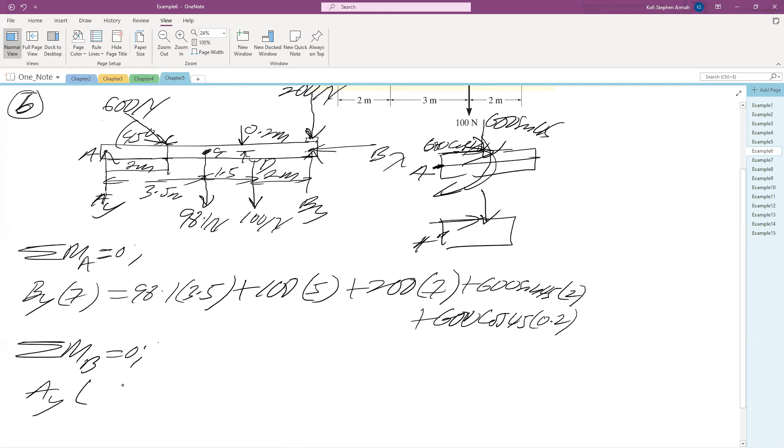Let's do moment about B. Who wants to help? We write this together, moment about B. Okay, Nathan, let's go ahead. AY times. So put your finger at B. AY times 7, and AY times 7 is going this way.

Okay, what else is going that way? Let's start with the 600. Break the 600 down and tell me which one is going the same way, turning it about the same way.

Times 5. The sine one will be pushing down, so the sine one will go this way, but the cosine one will be in the same direction. Yes, so this will be 600, and that's the only thing I wanted to show you for this question: 600 cosine 45 times 0.2.

Okay, which one else is going the same direction? And that's it. And this is equal to what? 98.1 times 3.5 plus 100 times 2. Done. The 200 will not have moment.

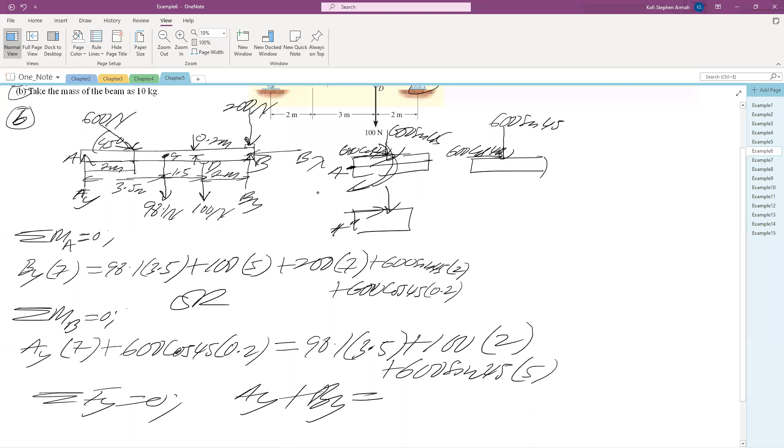Yeah, who was asking the question? Sir, please, I'm the one. But sir, I think the sine 45 should be multiplied by the 0.2 because of the thickness, then the cos 45 should be multiplied by the 5 because of the moment about point B. Put your finger at B.

Hold your finger here. Okay, I'm done. After you hold it, see whether this is not going to turn this way. The 45 will turn this way, and this cosine one will try to push it the opposite way.

Hello? Put your finger at B. Sir, if you press that, okay. If you press that B, the 600 sine 45 will turn this way, so it will go the same direction as the 98.1, the 600, and so on.

But sir, this one, you're finding the moment, we started with AY, that is AY times the distance 7, meaning it's going to turn it, I think, in the clockwise direction. So if it's turning in the clockwise direction, that means AY is going to multiply by the perpendicular distance. Then after that, you come to the 600 cos 45.

It's also going the same clockwise direction. So what is that, the distance from that place to point B is 0.2 instead of 5? Because the line of action is going this way, and the distance between them is 0.2.

There's a line of action, the line of action of the cosine component. It goes to our line of action, and the distance between them is 0.2. That's the cosine component - it acts at the top of the bar.

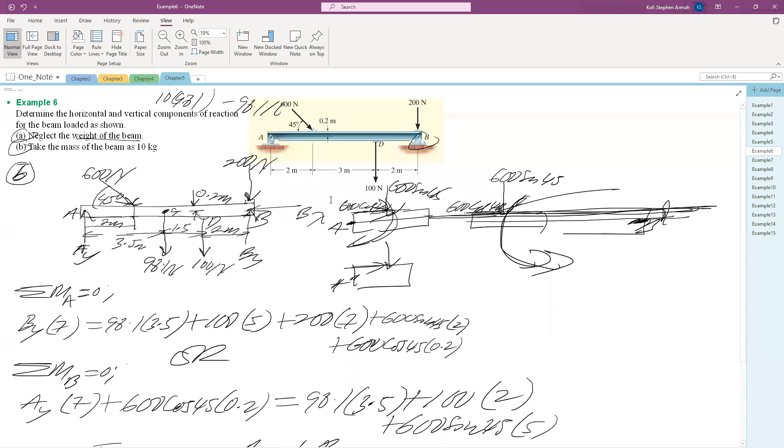the middle of the beam, not at the end of the beam? Yeah, the thickness is not 0.2. From the middle to the top is what is 0.2. So that's a good question - thank you, sir, very good question. So sometimes they will give the thickness of the beam, then you have to divide by 2. But it just gives the middle line. Let me zoom in so you can see - they give from the middle line to the top to be 0.2. So that's why I multiply by 0.2.

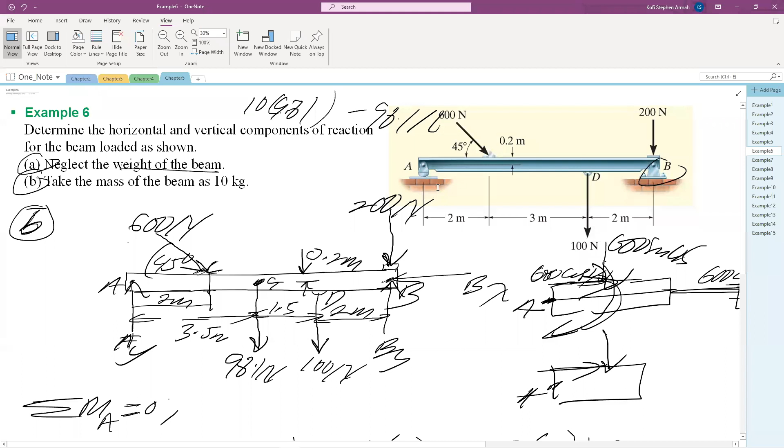Any more questions? So in this question, you can decide to take one moment. Sometimes people take two moments - that will be too much waste of time. Take only one moment and then do summation of forces in Y, then summation of forces in X, and you are done. Don't take moment twice, it's a waste of time. After you've gotten AY or BY, don't do moment again - just do sum of forces upward equal to sum of forces downward. You get the other one, then do sum of forces in X and we are done.

Let me do one more example and then these guys can go for the lab.

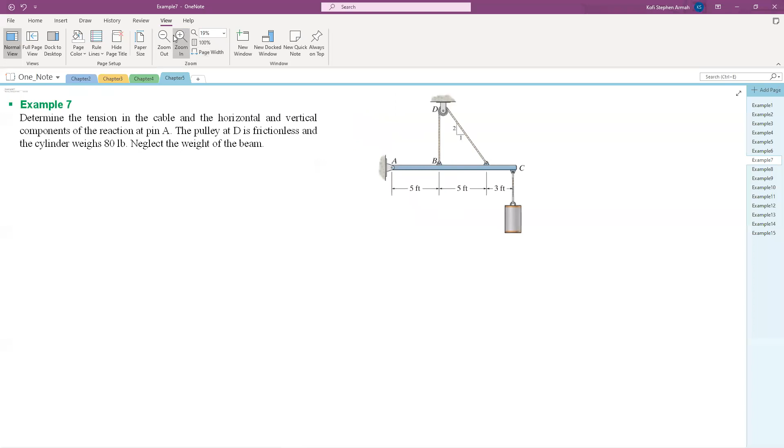We can do the main summary - everything I've covered up to this point, that's fine. Okay, let's do this one then.

Oh, somebody read a question for me. Determine the tension in the cable and the horizontal and vertical components of the reaction at pin A. The pulley at D is frictionless and the cylinder weighs 80 pounds. Neglect the weight of the beam. Okay, and anytime you don't give the mass or weight of the beam, it means we are neglecting it.

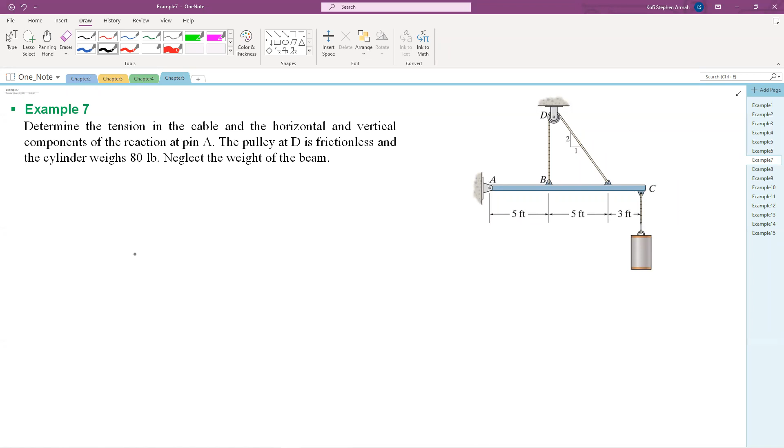Okay, so we draw the beam. We draw only the beam. We take everything else away. You cut the rope - you have to cut this rope, cut it. And then you show a tension arrow at the end.

This is a pulley. What do we say about a pulley? Remember that is a pulley - we make some assumption for now. We are saying the pulley is frictionless, so the cable is free to move. Therefore the tensions are the same. So let's call the tension T and T.

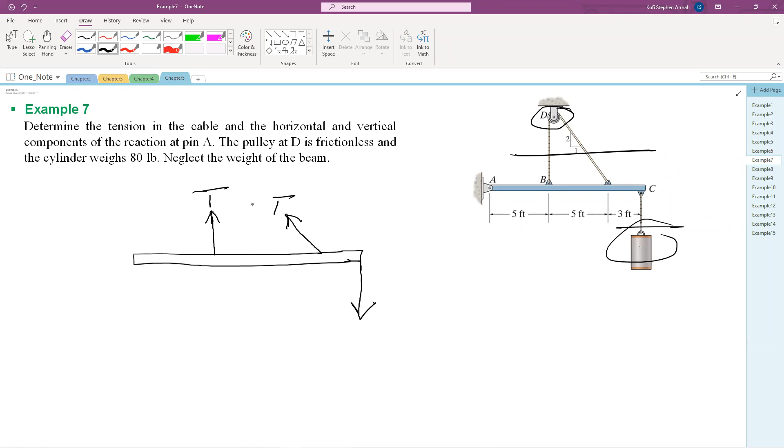This has a weight - the weight will be the same as the tension in the rope. So I'll cut the rope and show tension. But the tension is the weight, and the weight is given as 80 pounds. This point is C, that point is B, and that point is A.

Let me call this point D. Now what is happening here is it's a hinge that is holding it, but the hinge is cantilevered into some wall, so the only interest here is the hinge. So this is a hinge, and I'm going to show it. Let me intentionally do this so that I'll get a negative value - I'll intentionally get negative so that when you also get negative, don't panic. I'll put this one here so that this is AX, and this is - let me take it up - AY.

And let me show the distances given: this is 5 feet, 5 feet, and 3 feet. And this is point A. So you show everything, and this is our free body diagram.

How many unknowns do we have here? Three - that's the maximum we can have: the tension and then the two reaction forces at the hinge. And then we are done.

Okay, who can help me? What equation should I apply first? This time, straightforward - which one will you go first? Or what can you find first before you find the other two?

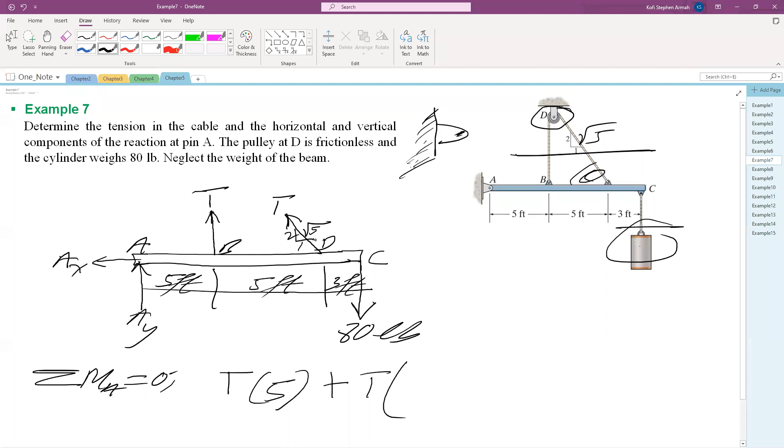So this is T times which one? The one that is going horizontal will not have moment. The thickness of the rod is being neglected, so this one will not have moment. The 1 over root 5 will not have moment. The 2 over root 5 will have.

So this is 2 over root 5, by 5. So T times 2 over root 5 is the force resolved. Before you multiply this by 10, that is the distance, to get moment. And this is now equal to 80 times what? 80 times 13. Done. Have you seen the way I write them? It means you're already one step ahead of rearranging.

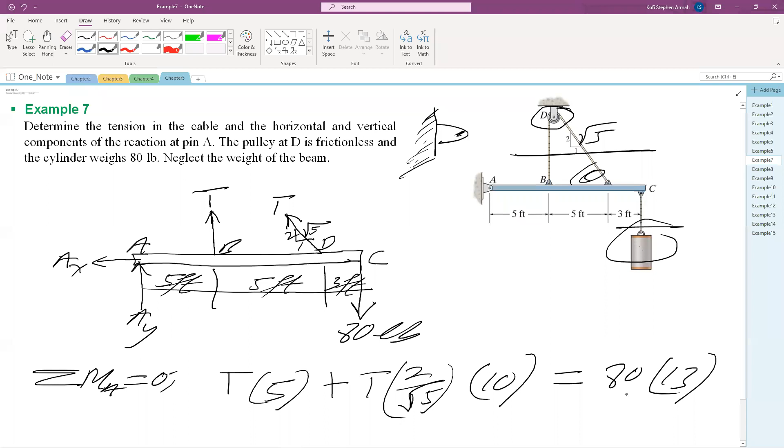And then you just use the calculator, factorize T out, make T the subject, work it out. I will not do this, you will do this later. What equation will you go next?

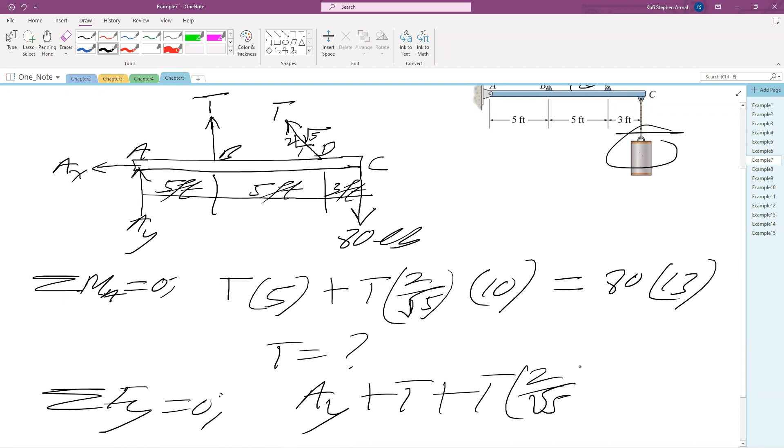Then everything is easy now. You do sum of forces in the Y. What do you get? What can help me? AY going up, plus T going up, plus T, 2 over root 5, is equal to 80. This allows you to get AY because you know T.

Then you do summation of forces in the X equal to 0. And what do you get? Let me zoom out before small, then you see. My AX, look at my diagram. Have you seen my AX is going to the left? Plus my T, 1 over root 5, is also going to the left.

And this is equal to 0. So AX will come out as negative. Please, it's correct, don't change anything. Leave the answer like that. Don't change your free body diagram too. If your unknown support reaction comes out negative, don't change anything, they are correct.

Unless maybe they are looking for the magnitude, then you say, okay, the magnitude, if the answer is -5, then you say the answer is 5 magnitude. That's all, and sometimes that's what we are interested in, the magnitude of the support reaction component. So I'm done, because people have this.